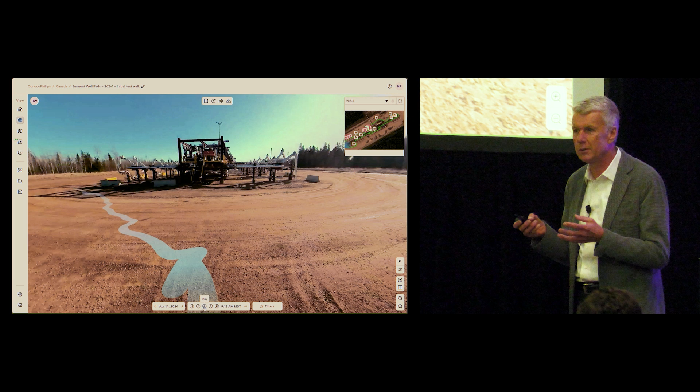So with that, what I want to do is just take a look at two technologies, very simple things. Bear in mind that we're starting with a business now that doesn't really understand digital twins. They don't care about digital twins. How can we get them excited about a three-dimensional way of working? And so I'm just going to hit play on this movie here.

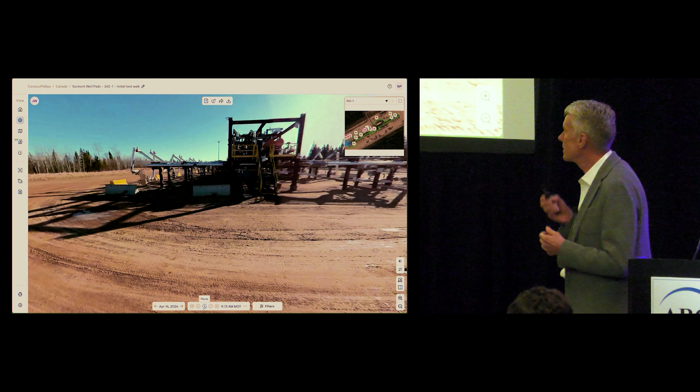And we're heading off to Canada. This is Surmont, one of our assets in Canada. This is the well gathering area, basically, for our heavy oil assets here.

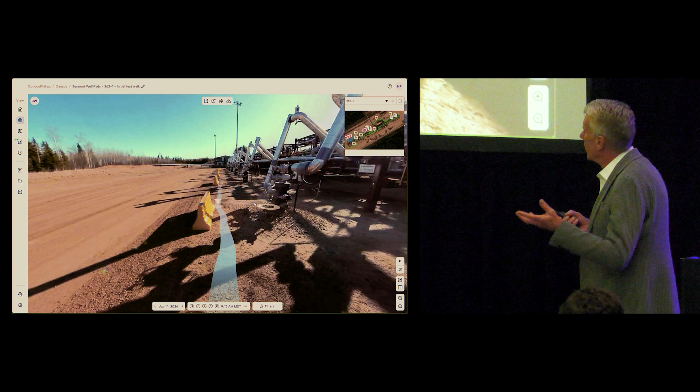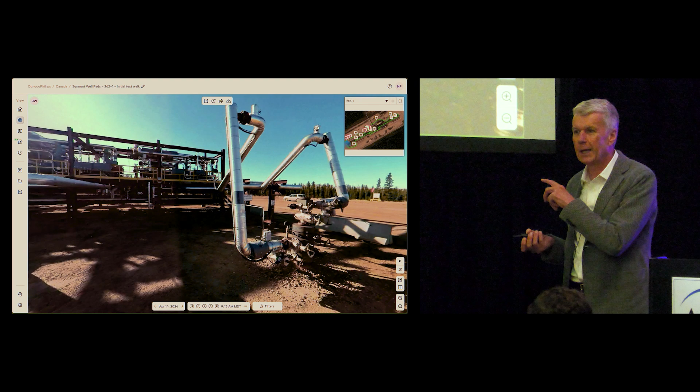And this is just using a consumer-grade 360 image capture tool. The first point is right there. There is no bad angle on a 360 capture. So typically when people are taking photographs out on site, they end up as just a pile of files on disk.

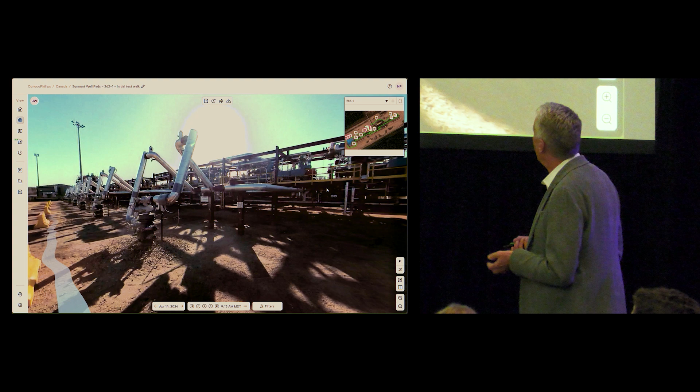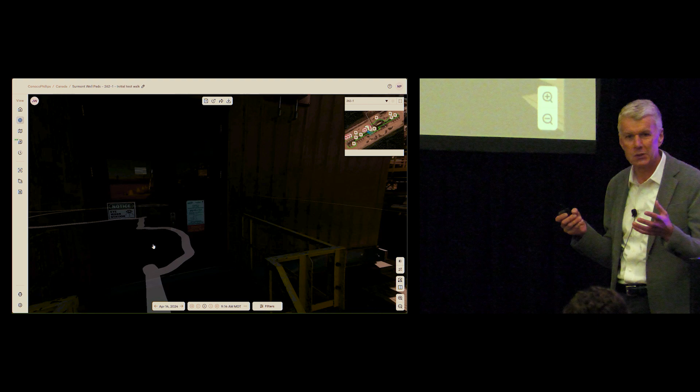Here, everything is date stamped, time stamped, and available to you right away. So think about the use cases here. How many times do our operators have to go out to site just because some engineer wants some measurement somewhere? It doesn't take much to do that.

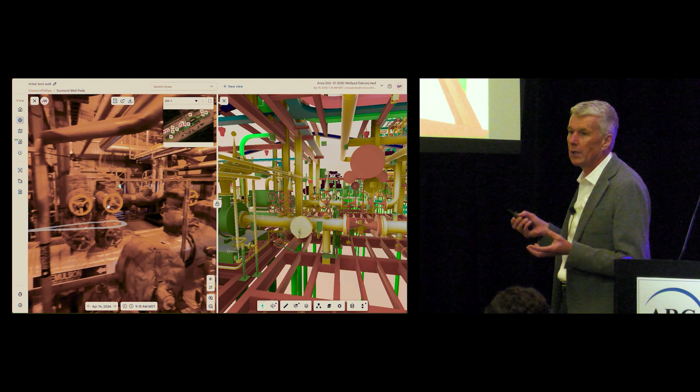We've just jumped from the outside to the inside. Now we're looking at a lot of the equipment in there. We've got a bunch of the valves as well. In this one, we're kind of lucky, we do have the building information model, so we've brought that in as well. Again, that's information that typically is not in the hands of these types of operators.

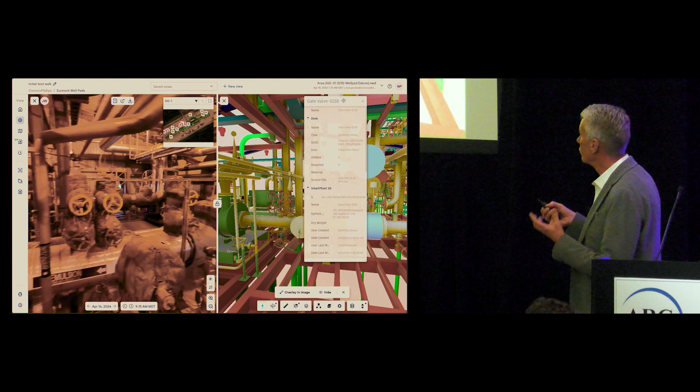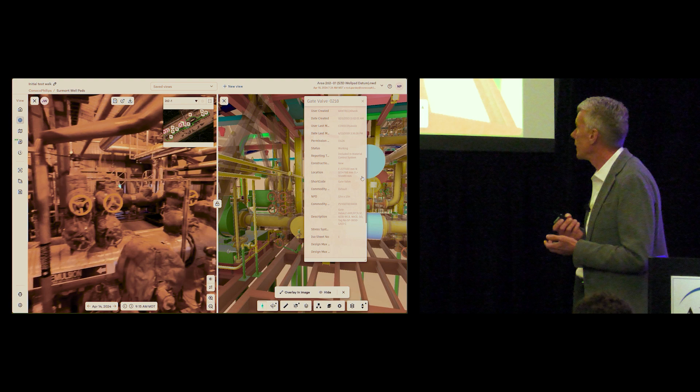This is cloud-based technology, doesn't require a fancy PC. I simply just fire it up. Now I'm just clicking on that model, and I'm looking at the metadata that's associated with it. So again, just all really kinds of useful information: what type of valve it is, what its coordinate location is, what the tag numbers are. All of that information, and it doesn't require any kind of specialized information or systems to actually do this.

So very powerful just to be able to get this information in people's hands. And that's just some of the basics that are really kind of important to these.

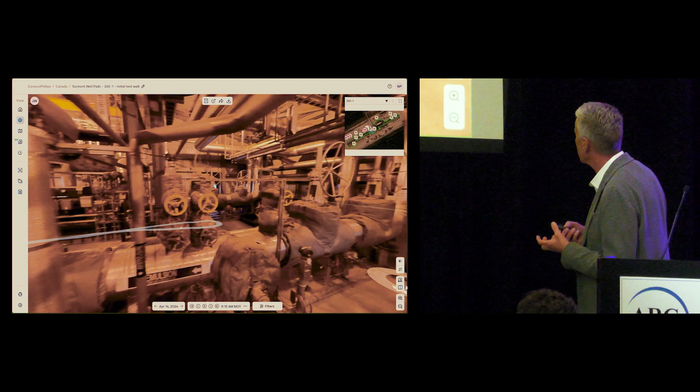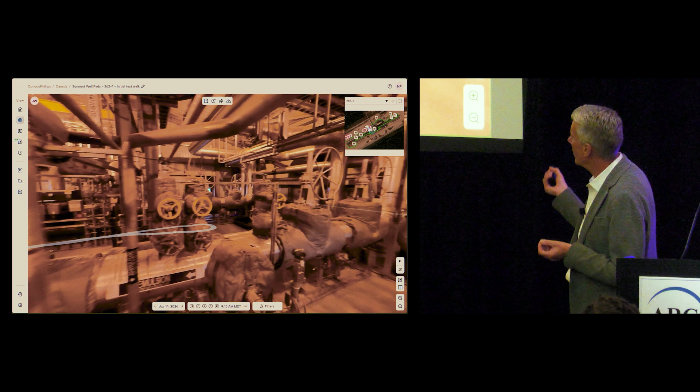As well, we've got a lot of groups that are using this. Our capital projects love it for project documentation. So if you want to monitor progress, this is a great way to do that. Here we've got a split view that's going between those two views there, and you can look at different date stamps and compare the two.

And then the last thing is this ability to be able to integrate both 2D and 3D together. But the key thing is that 2D is stored relative to the model, so you know where everything is all the time. This is just an example where we're just marking up some documentation here. I can add a description to it as well.

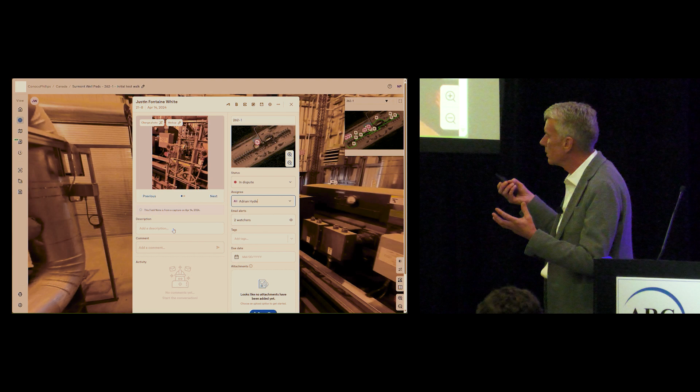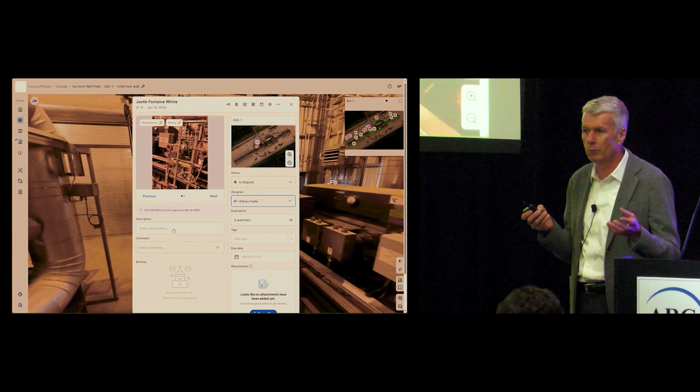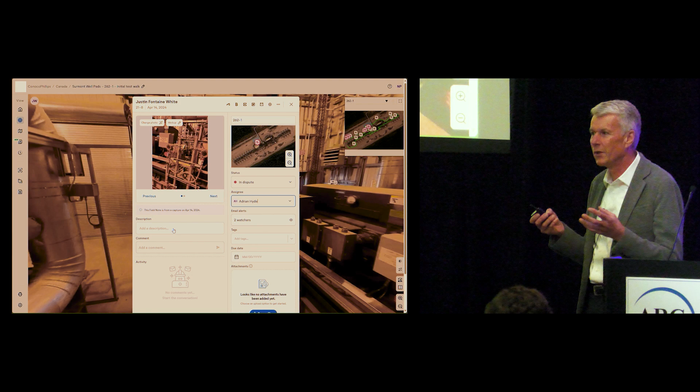We've just recently acquired Marathon Oil. I was up in Bakken just two weeks ago with our asset assurance group. This was engineers from all of Lower 48. We gave them one of these cameras, and by the end of the week, they were all experts on this, and they were incredibly excited about this. This actually became the tool they're actually using for their assurance for these heritage Marathon operation tools. So just very powerful, but very quick, very easy to do, and very cost effective.

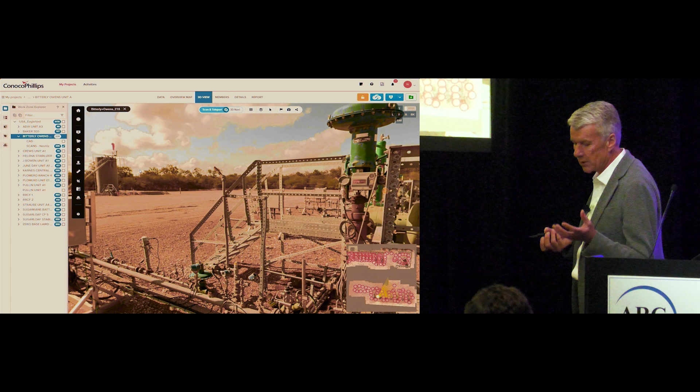Of course, the next thing that's going to happen is, well, I want to do some measurements off of that. So now at that point, we're down to digital reality here. And I'm going to take you to another different site here. This is actually the site. It's in the Eagle Ford, about 3 hours drive from Houston.

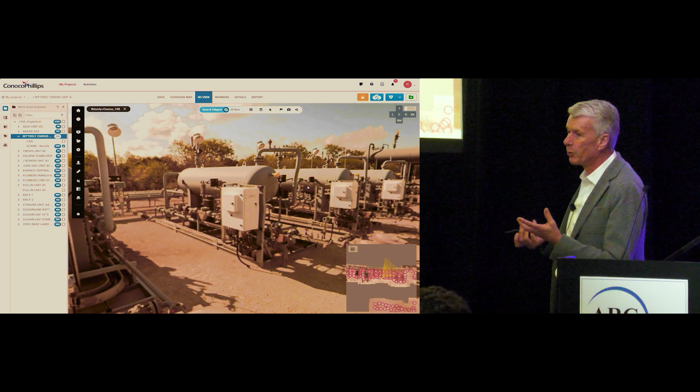There's all of our wellheads. This is our MSO, or boot camp training site. We have occasions where we can't get out to site because of weather, those kinds of things. We've had our operators, who are not necessarily the most tech savvy, actually teach their training class based on this technology. So just great savings there.

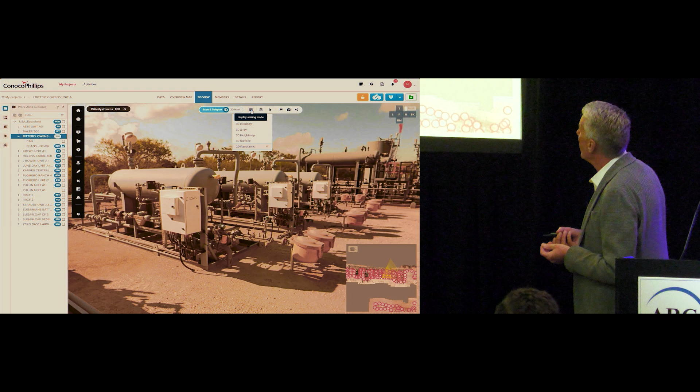And if we look at this, to acquire this particular data set, I actually did this acquisition. It was about an hour to go and acquire this data set. And you're looking at an X-ray image of that. You can see the millions to billions of points in the LiDAR data there.

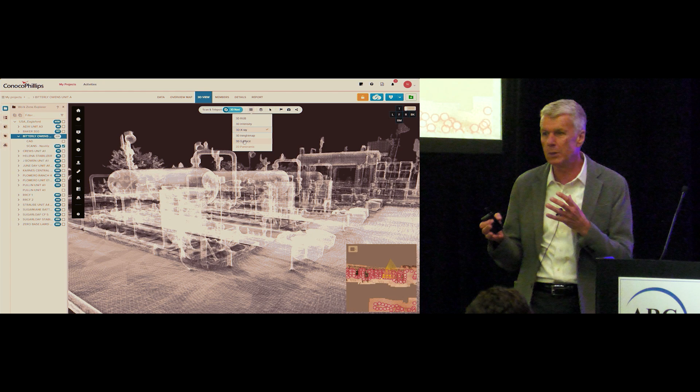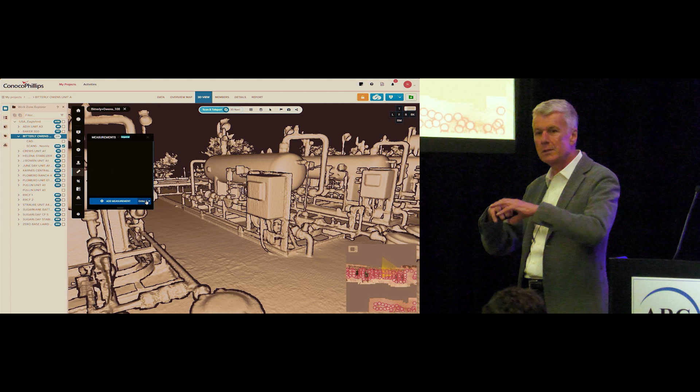If we look at this, we can move it around in a couple of different ways. The most important way is that we want to do this really quickly, so you can mesh those points and look at it as a surface. If I could stop this, I'd make the point that it looks like an engineering design model, except it's reality capture. And if you look at those individual assets, if I could segment those, I've got a digital twin at that point. So that's what we're really shooting for here.

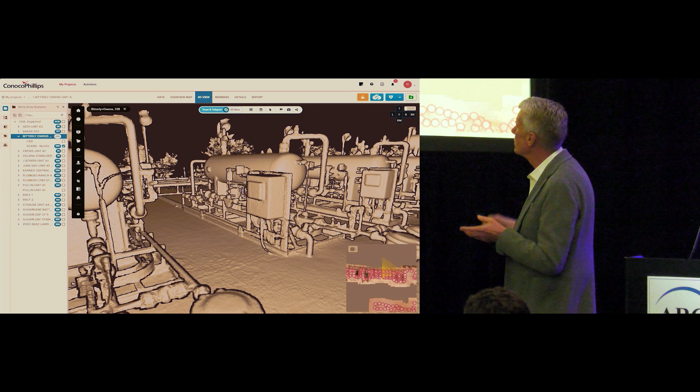Just some basics, guaranteed to get every engineer excited as soon as they see this. It's like, what do you mean I can measure the pipe diameter? Sure, we can do that. The does-it-fit exercise, can we push a piece of equipment through between two different assets? Yes, we can do that. So incredibly powerful just to be able to look at this data, and bear in mind, it was 40 minutes to about an hour to acquire this.

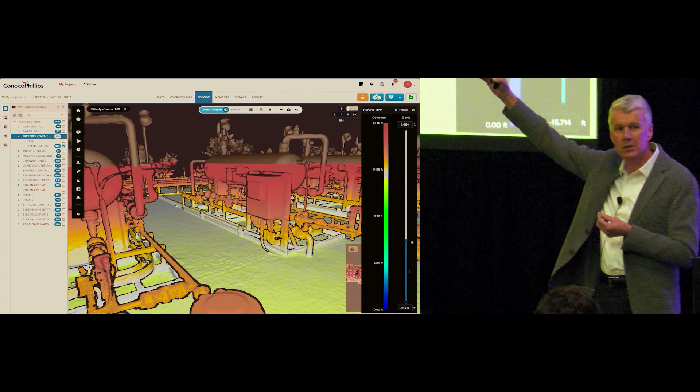Simple ergonomic exercise here. Let's go ahead and look at everything below 6 feet. That's a problem if the valves are above 6 feet, because people can't reach them. So just some simple things that you can do really quickly. Again, this is all just basic stuff that really gets our field staff excited about the technology.

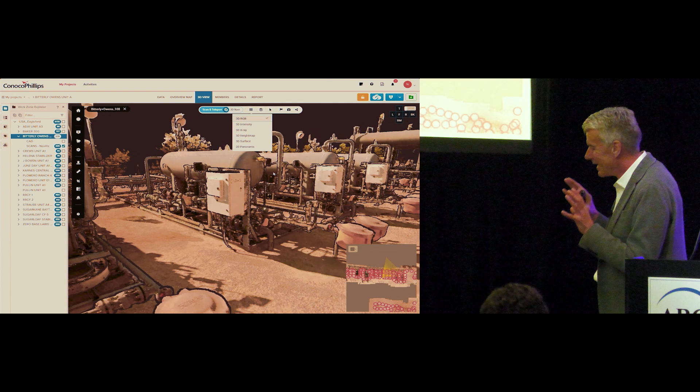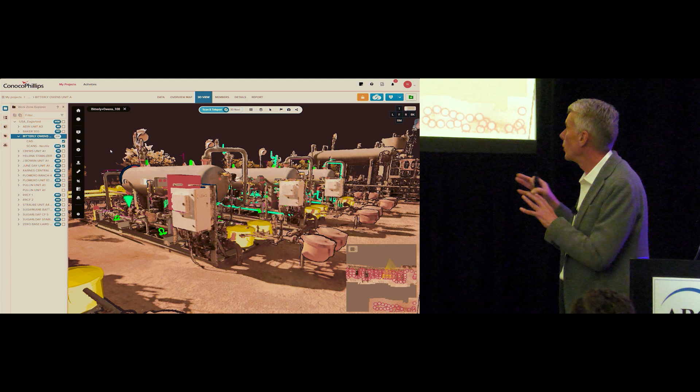We're fortunate in this case that we've actually got the LiDAR data for this, and we've got the engineering design model for this. What I'll say is that this data set has now been 100% adopted by our in-house engineering design group. We have 20 guys that go do piping design.

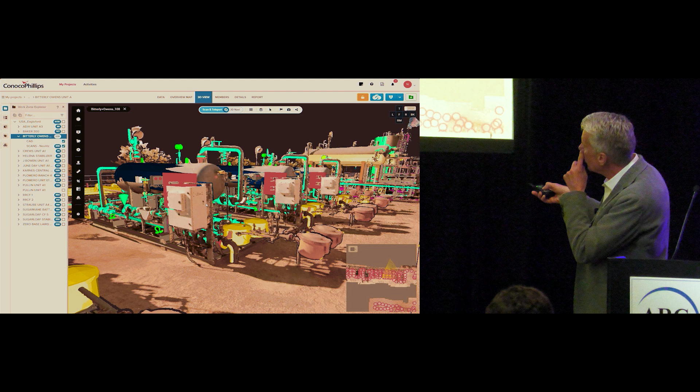Here we're looking at the difference between our model and our LiDAR data. So this is right here, it's as-built versus as-design. If you look at these electrical panels, you can see there was a change in the design between when they designed it and when they built it. If we look at the offtake pods here, you can see that changed as well. So for the engineering group to be able to very quickly do that visual analysis and understand what's changed, that accelerates their whole design process as well.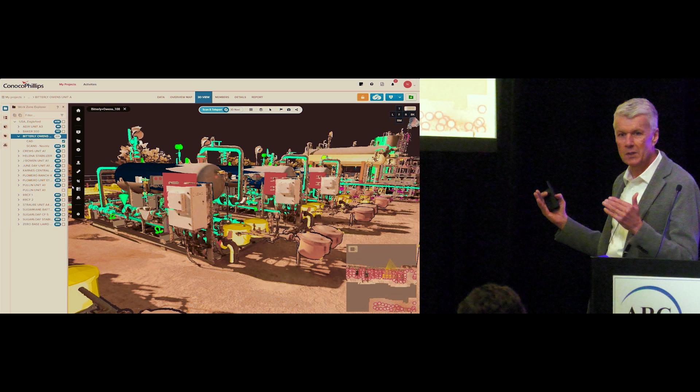In fact, they like it so much they stole our LiDAR system - or we haven't seen it since - and they're going out and acquiring a whole bunch of data out in the field. This is one of the things they really love, just this difference between my engineering design model and my reality capture here. So great to be able to see that, and you can start to quantify the differences between those two.

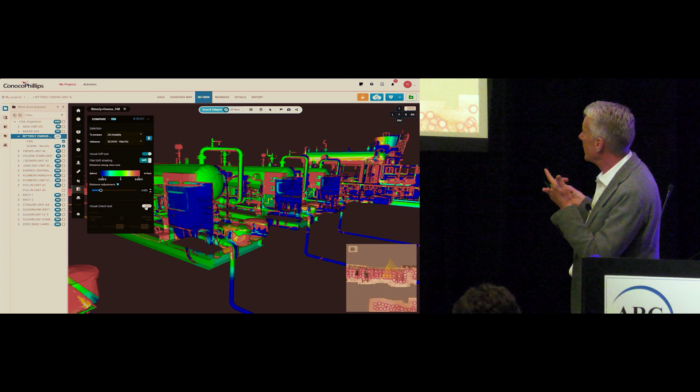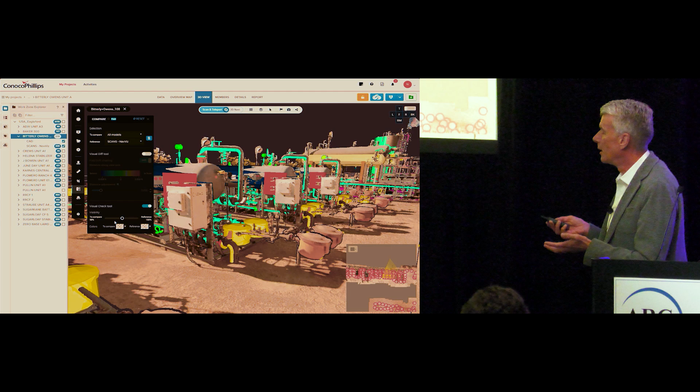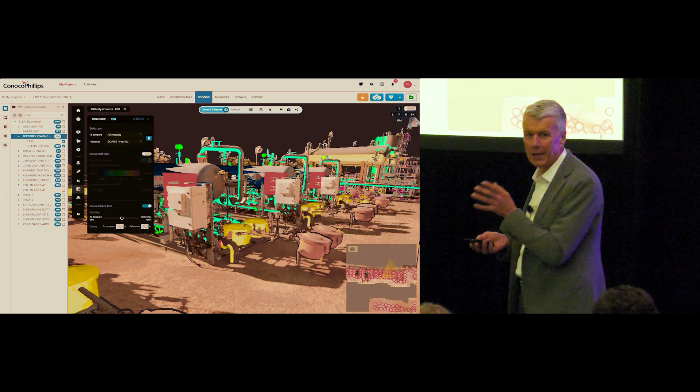Useful things here: for instance, my CAD model has the subsurface pipelines, and I can't capture that with reality capture. But straight away, being able to go and work backwards and forwards between those different data sets, this is really getting people excited. Obviously, basically the plan is get them hooked with this stuff, and then we'll start to figure out how to build a digital twin from that.

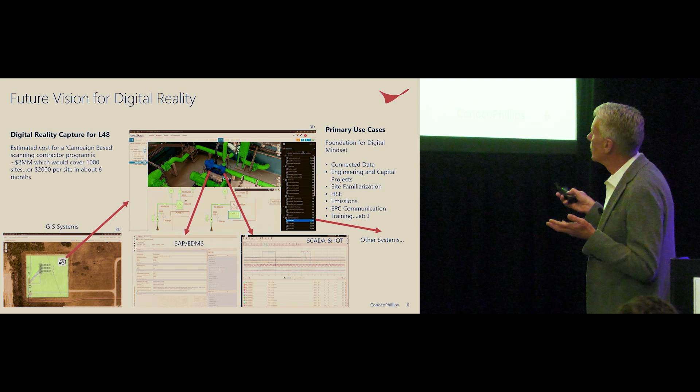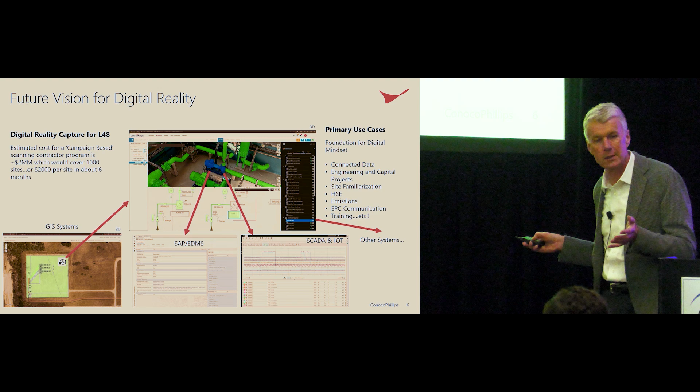So just to finish up here, here's the vision for where we really want to go with this. Nothing unique here - I think lots of people in this room are actually probably ahead of us - but basically it starts with the GIS systems, being able to just pick on that GIS system and jump out to my three-dimensional world. Segmentation of that LiDAR effectively gives us that digital twin. We can connect to individual assets, connect to SAPs, connect to our documentation systems, real-time systems, and then enable all of those digital twin workflows, but without the cost, expense, and time of going through a full digital twin workflow. So that's my message. Thank you.